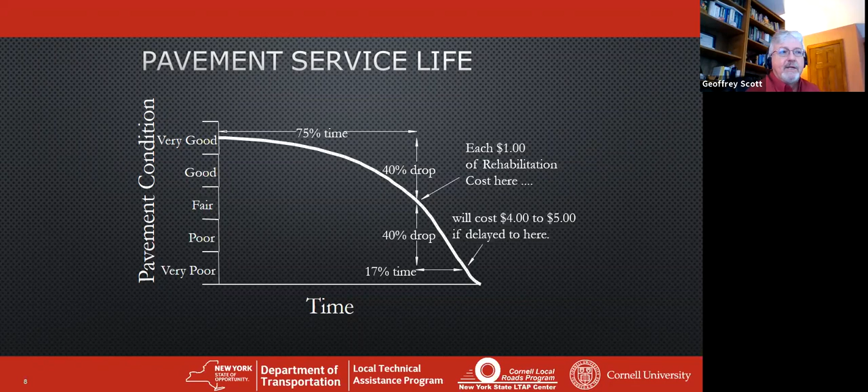That's when we need to do our work, do these rehabilitation techniques, put a new surface on it, seal the cracks, keep that road good, protect that base from getting soft. Because once it passes that 75% time, those cracks open up, let that moisture into the base, and that's where our problems come as far as failure with the roads. And the same concept with any piece of equipment. Once you let it go beyond a certain point, it kind of compounds itself and causes problems.

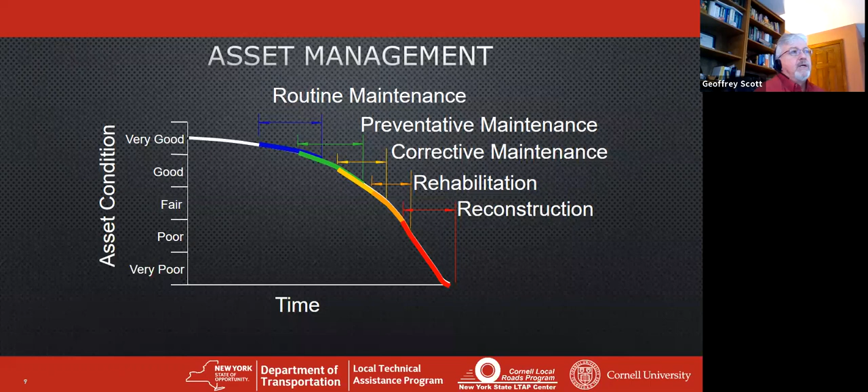And the idea behind asset management is to maintain those things with routine maintenance, preventive maintenance, corrective maintenance, and try to avoid that rehabilitation and reconstruction, because that's where the real expenses come. There's always the adage, you could pay me now or pay me later. It's the penny wise and pound foolish concept. It doesn't make sense to save pennies now when later it's going to cost you large amounts of dollars.

I guess a comparison is that deferred maintenance is like a debt with a very high interest rate. The debt will have to be paid at some time in the future, but the longer you wait, the more it's going to cost. Here's an example with pavement. Say a pavement section was built about 12 years ago. Today it needs a surface treatment, just something to seal those cracks, keep a good surface on it. That might run $20,000. Again, these are all hypothetical numbers. It's not something you're actually going to find, but it's going to cost an estimated $20,000.

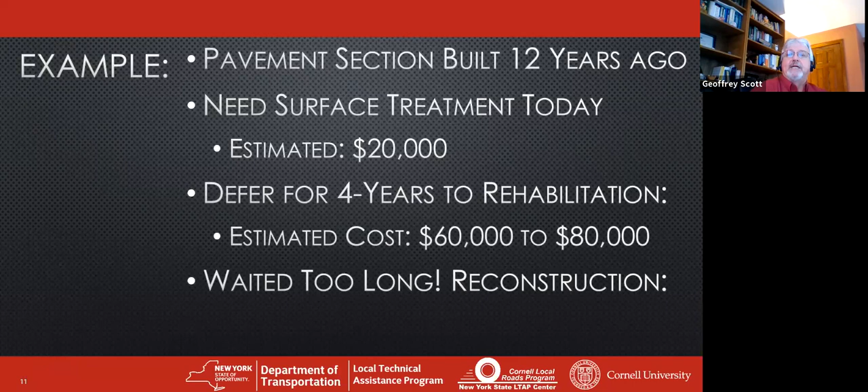If you put it off for another 4 years, now those cracks have opened. You've got moisture going into that base. Now you're starting to affect the base. The base is starting to move. The surface is starting to crack. You're getting alligator cracking. So now you're going to have to do a little bit more work to maintain that road to get it up to a decent level, an acceptable service level for the public. And that is going to substantially increase what it's going to cost to do it.

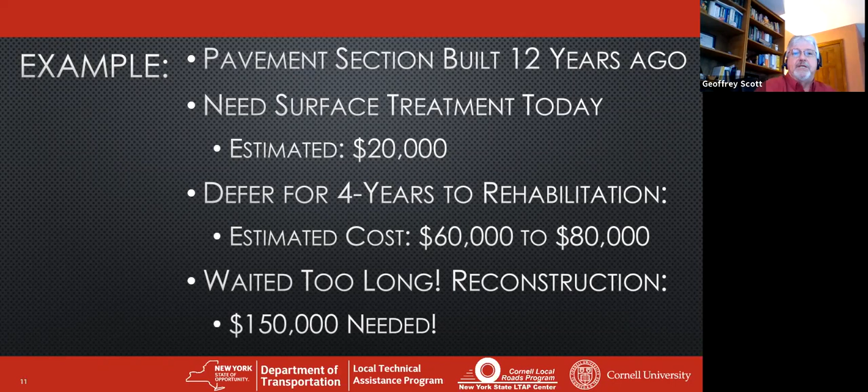If you put it off till the end, you wait till it completely fails. Now you're spending $150,000, and that's on the low end if you're doing any kind of reconstruction. So what you could have done 6-7 years ago and saved with $20,000, even if you had to do it 2 or 3 times over those 10, 12 years, it'd have been a lot cheaper than the $150,000 plus that you need to do. So again, trying to maintain them and keep them in good shape. This is kind of the basic concept behind an asset management plan.

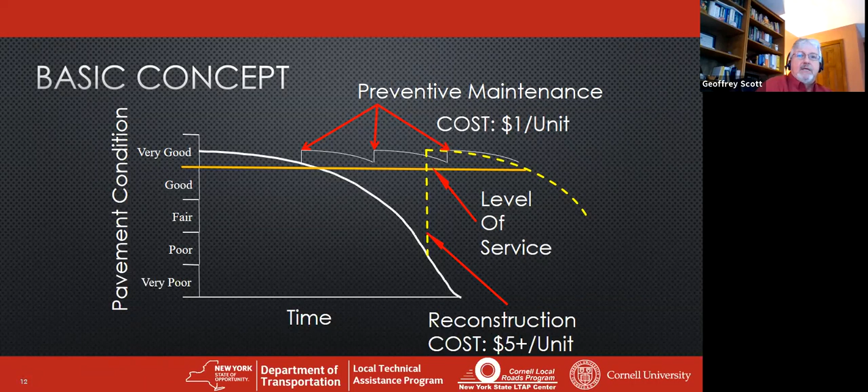You do that preventive maintenance, you keep those things in good shape. Not only is the level of service, particularly for roads, going to maintain and be good, but the quality of operation of equipment is also going to be that way. So again, we're going to try to avoid these lower end reconstruction and rehabilitation. That's kind of the focus on how you're going to look at when you maintain your items and controlling your assets and how they go.

Now, as far as asset management, everybody maintains their assets in some capacity, whether it's just spraying it with a hose to keep it clean. It might not be the best way, but it's still a method of maintaining. We all do some type of management. Pavement management, there's always last year's budget, just following up what you did last year, maybe some incremental increases. The squeaky wheel, where you just try to appease the local complainer, the resident that's making all the noise, and you fix their road. That's not necessarily the way you need to approach it.

There's also a standard program, where you've established a program based on periodic maintenance, such as a seal coat every 5 years or an overlay every 10 years. We've got the worst first, which is one of the worst, so to speak, where you do the major maintenance on the worst roads possible. This is where you spend all your money in one spot, and then the rest of the whole network of assets, or in this case, roadways, pavements, actually fail. And then it takes much more to bring everything back up.

There's always the political pressure, using political considerations. When I worked as a consultant, there was always that November push, or the October push to get roads paved in different wards within a village or a city, just to show that that ward, the politician in that area, was actually getting something done. That's the wrong way about going into it as well.

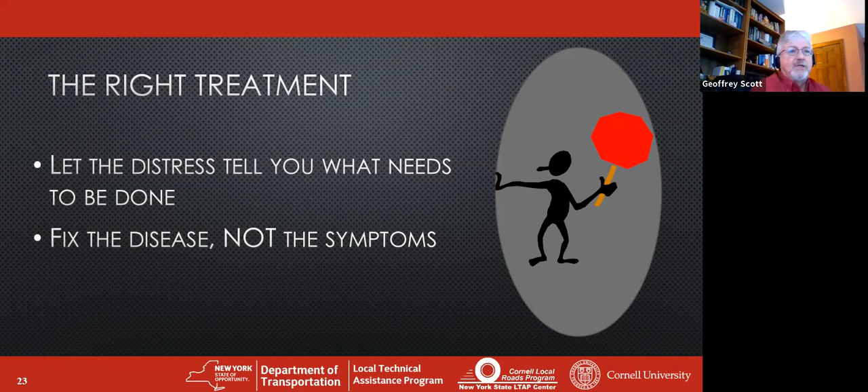I don't know if we can do these. I got a first set of questions here. We do have them. All right, question 1, do you have an inventory for assets you are responsible for? Second question is, do you have a plan for the next 5 years for those assets? And number 3, do you have enough funding to maintain those roads?

And as you would expect, nobody has enough funding. As this pandemic continues, it looks like we're going to have less and less. So it looks like everybody has some sort of inventory for their assets. That's a great starting point. As far as a plan for the next 5 years, that's encouraging too. And enough funding, that's disheartening, but it is reality. So, as I mentioned, it's good to see that you've got inventories for the assets that you own and you do have a plan for the next 5 years. That's very good. But as far as the funding, let me say that's disheartening.

All right, let me get that off my screen. There we go.

There we are. What assets should we look for? Well, in short, all of them. Anything you have to maintain, you want to be able to have some sort of inventory and know what condition they're in. But the obvious are the roads and streets, the culverts, your signs, guide rail, equipment, facilities, water systems. If you've got that, maybe you've got subsurface drainage systems or sewer lines. All of those you want to have some sort of inventory, and then you want some sort of way of being able to inspect and analyze them to make sure you're getting the best out of them. So we'll look at a few of them right here.

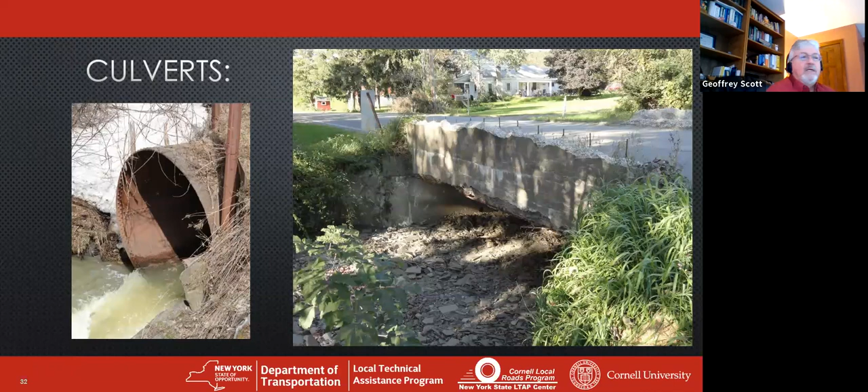And if you're going to do any new paving or anything, probably a good idea to check those culverts, make sure they're in good shape, that you're not going to have to replace them in 3 years after you've done a reconstruction on your road. Again, just another asset that's out there. Some of the things to look at.

Again, you want to know where it is, so the road name is going to be helpful. It's going to have a specific ID, so you can identify that specific one. Having some sort of a location, whether it's a GPS or stationing, is going to help you find it in days like today where they're buried in snow. If there's a skew, that's going to be important too. That's going to change the estimated length of what that culvert's actually going to be. If it's perpendicular, it's going to be a lot smaller than if it has a skew to it.

Depth of cover is going to be an important thing to know. Again, these are all inventory things that won't change over time, but knowing what that depth of cover is, if it's 12 inches, it makes it feasible to change. If it's 12 feet, now you may need different types of equipment.

Number of pipes is useful. The length of the pipe, the width of the pipe, and the height of the pipe will go kind of hand in hand with the shape. If you got a squash pipe, the width is greater than the height. Or if you got a circular pipe, they're going to be the same.

Knowing the material is useful. That'll help you determine with the install date how long that material actually lasts. If you're only getting 5 years out of a galvanized pipe, maybe you need to consider a different type of pipe. And with any of these, it's important to have some sort of layout diagram that gives you an idea where it is and how it's laid out, because it allows you to provide a picture when you need to.

And a lot of this information is going to be imperative when it comes to getting reimbursed from FEMA should a big flood come through. If you don't have any of this information, they're not going to help you. You'll have to replace that pipe with no support.

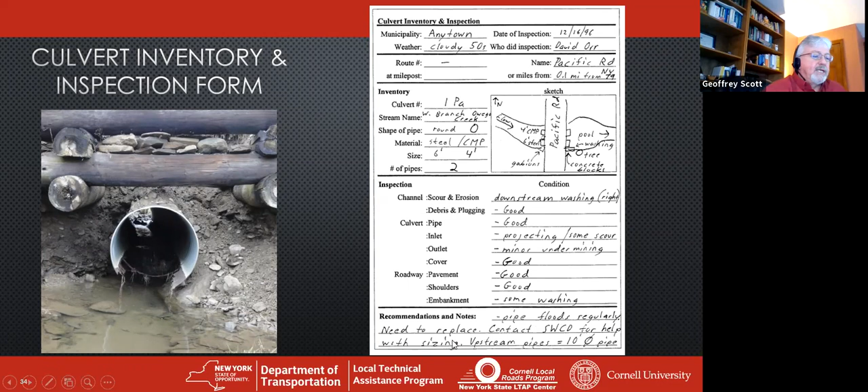This is, again, a simple one. Any kind of recommendations, anything that needs to be done sooner than later. And I mentioned this is available in our roadside drainage manuals. So that's available at any point.

So the distresses, what might you be looking at? Again, you want to identify these distresses and the damage types, because certain types of damage are going to cause other problems later on. How is the shape? If it's starting to sag in the middle, maybe you've got a loss of support in the center of the pipe. Maybe that's due to piping or poor compaction, but again, it's going to tell you a little bit about what the problem is. Scour, obviously, in the inlet or the outlet.

The same with the joints. Failure of the joints can allow the support around the pipe to fail. Debris fills the pipes, but also sediment within the debris too. That's going to reduce your flow capacity. So some of the things to look at.

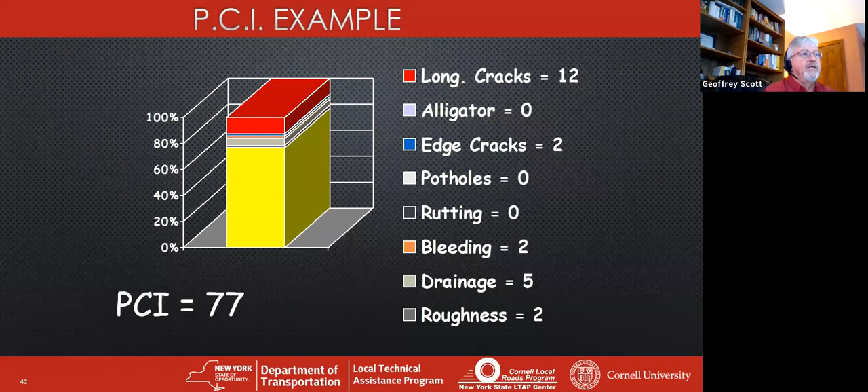So the PCI example on how that works. This is a pavement. They've done their inspection. They've determined that the condition deducts 12 points for longitudinal cracks, 2 for edge cracking, 2 for bleeding, 2 for roughness, and 5 for drainage. So you add them up and subtract them from 100, and you get a pavement condition of 77. Now, one thing to note, this isn't a PCI you would get from AASHTO or anything. This is just a generated deductive value, but it helps identify roads as they go along. It gives you an identification of what condition they're really in. So I mentioned the simple priority formulas.

And they don't use cost comparisons. When you start throwing money into things, it skews views and opinions. So the idea is basically let the conditions tell you what needs to be done. So we don't use any kind of cost comparisons. That comes after you determine what really needs to be done.

It doesn't include any future deterioration. It doesn't do any analytics, iterations, or any of that to help determine what that future is going to be. And it's easy to modify. Again, we want to try to keep it simple.

Again, the importance are 1 through 5, low importance 1, high importance 5. That'll kick that priority number up higher. The same with the traffic. The condition is basically based off of that PCI, the pavement condition index, and that's divided by 10. That's a determined value from elsewhere in the software.

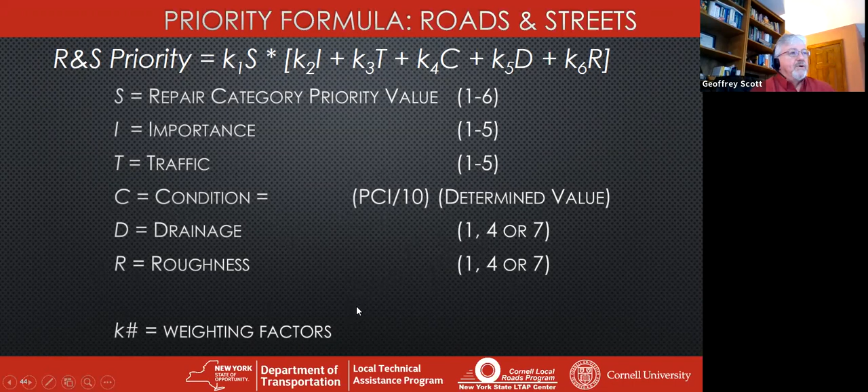Then we have the drainage and the roughness. And these are essentially good, bad, and ugly, and then the deductive values for those. So it's pretty straightforward, and it is, not manipulative, but easy to modify.

Culvert priorities are set up very similar. Again, we've got a repair strategy value here. We've got our traffic and importance. These are the same as for the roads because they are under those same roads, so the traffic and the importance of those roads still hold that credibility. In this case, we've got our culvert condition, again divided by 10. And now in the end, we've got flow and then environmental.

The flow basically is just a good, bad, and the ugly on how well that culvert passes on a normal basis. Does it never flood? Is it a good one that you never have problems with? Then you would give it a 1. Sometimes it floods, maybe it's a 4. If it floods every time it rains, then maybe you've got a 7, and that's going to kick its priority up.

And we worked with the Water Resources Institute at Cornell, and they had requested we add an environmental factor for the aquatic organism passage. Now, this isn't going to apply to every culvert. There's going to be the NA, which is going to be a 0 value. And then it's going to be, again, good, bad, and ugly. If it's good, it's not going to rise to a higher priority. If it allows anything to pass through, that's good.

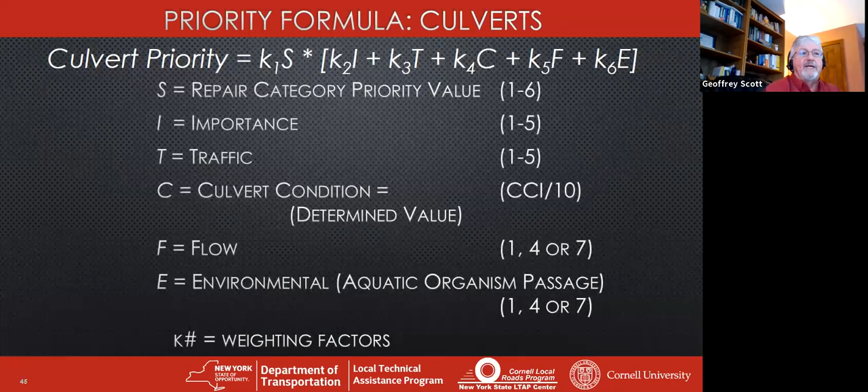If you might have a little bit of perching or difficulty for any kind of critter to crawl through, that would be a 4. If it's perched, you've got feet between where the outlet comes out and where it lands below, then it's going to be a 7. Nothing's going to be able to go through there. It's just a means of identifying critical culverts. And then everything is kicked out into a spreadsheet.

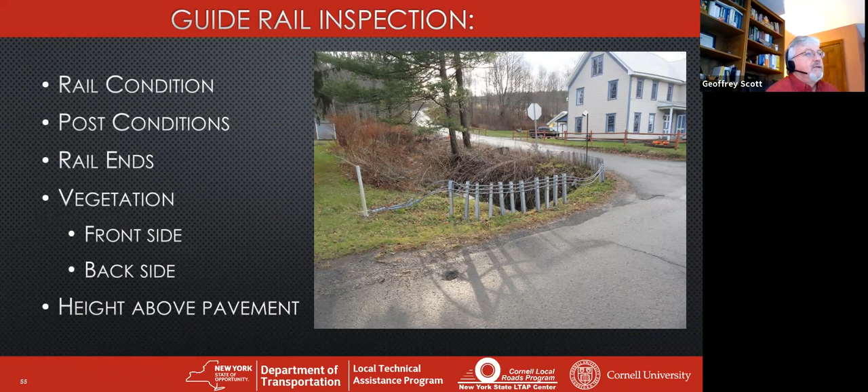You start to assess the conditions. This cable rail right here is not going to really guard anybody from anything, let alone guide. It'll guide you right into the ditch and hold you up, but it's not going to be effective at what it needs to be doing. Post conditions, the rail ends, knowing what your posts are. Are they really going to hold when they get hit? Understand what's out there. Do your regular inspections. That right there is a big liability should someone actually sideswipe that rail.

The vegetation is critical too, not only in front of it, but behind it. Large trees behind the guide rail are just as dangerous as they are in front of the guide rail. And why? Basically because those rails flex. They're not solid. They flex when they get hit and they bow in. If you've got something close to it, you're going to hit that tree as that rail flexes. So understanding where the vegetation is and keeping it clear is good.

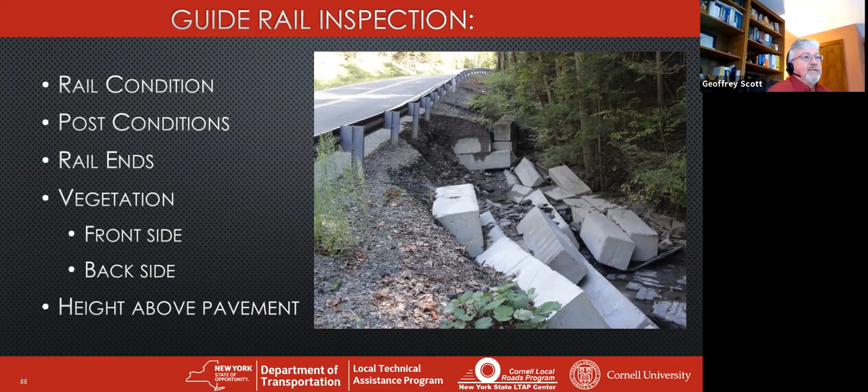And the height of that rail above the pavement. A lot of times roads have been paved, layered and layered, and that rail just stays where it is. Next thing you know, it's only 12 inches tall relative to the traveled pavement. So again, just keep an eye on that kind of stuff and understand there are other things to look at. Again, fleet, your equipment, those are all pretty critical.

And again, inventory of your equipment, your tools, other machinery. It's good to have that inventory. In fact, by Highway Law 142, it's required to be filed with the town board on or before September 30th each year. So having that inventory is going to be very useful, and also help you be in compliance. And these forms are all available through us as well.

When it comes to vehicle inspections, again, another critical thing. You've got your annual inspection: go through that vehicle every year, double check, see what's going on, do a good thorough inspection. I spent quite a few years working for UPS before I went back to school to be an engineer.

And one of the things that they were most impressive on was doing inspection, preventive maintenance, PMIs, they call them, preventive maintenance inspections. So the vehicles would be inspected, anything within the facility would be inspected, conveyors mostly. But again, having that regular inspection is going to help identify problem areas and problems before they show up and end up costing you money. So just having those vehicle inspections.